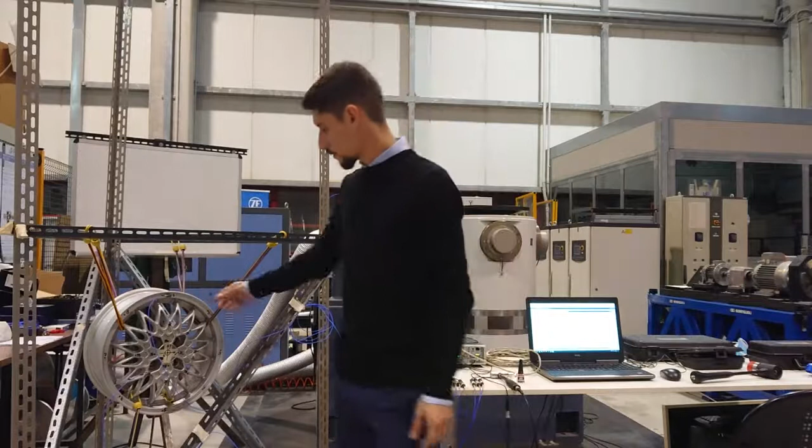So here we've got our rim that is suspended with these elastic bands in order to recreate the free boundary condition. I have already discretized our rim in 36 points. There are some points along the circumferences of the rim, other points here in the width between the two flanges, and other points instead here on these faces between the spokes.

Moreover, I have put the origin of the absolute reference frame, so our global coordinate system, here in the center of the rim, and I have already attached these triaxial accelerometers in these 2 points. In this case, for this analysis, these 2 accelerometers will be fixed in this position for all the time of the analysis, because we will use the hammer to impact all the other points, and therefore we're gonna perform the so-called roving hammer analysis.

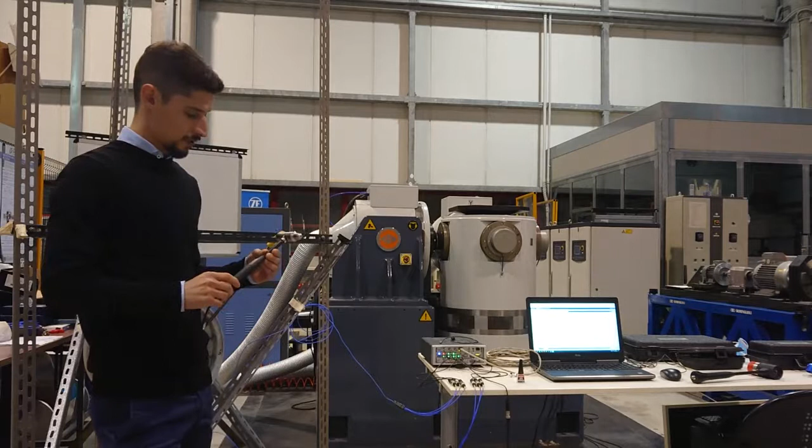This is the hammer that we're gonna use for the impact testing, and this is a special hammer, of course, because inside there is a transducer that can measure the force, and we can also remove the tip here of the hammer. This is a steel tip, but we've got also other types of tips. For instance, in plastic material with different hardness, and you can choose it depending on the material the test structure is made of.

I want to show you also other types of hammer with different dimensions. This is a very small hammer that can be useful for micro vibration analysis, or we have also the biggest one. You can use this hammer for large or heavy structures, and of course the bigger the hammer, the smaller the frequency band that you can cover.

Then of course the accelerometers and the hammer must be connected with the SCADAS. This is the data acquisition hardware, the SCADAS Mobile with just 8 input channels, but they are enough for us because in our case we have just 2 triaxial accelerometers, so 6 channels in total, plus of course the channel for the hammer, and then the SCADAS is connected via Ethernet cable with the computer. And that's all. As I said at the beginning, the setup is very simple. So I go to the computer and we're gonna perform the analysis together.

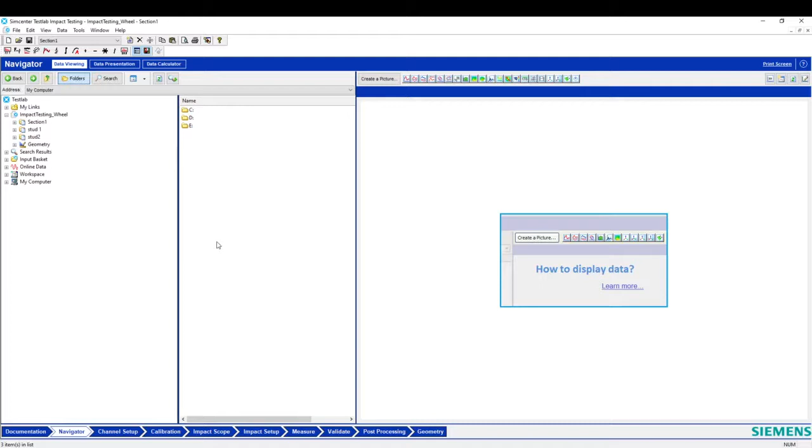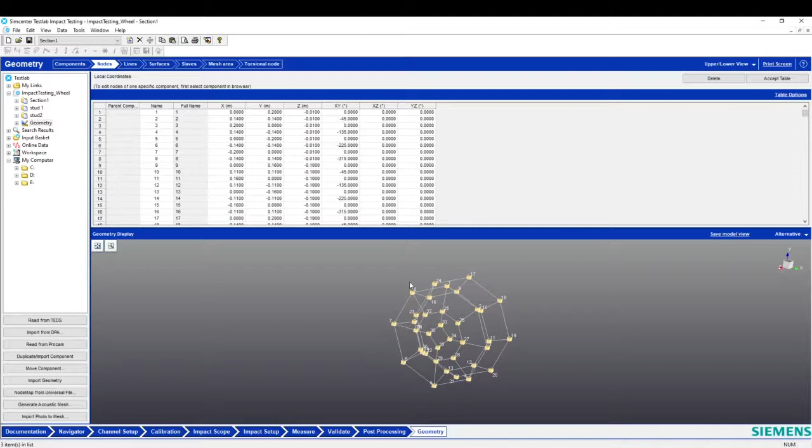The first step is to create the geometry file, or maybe import the geometry file. So we go here in the geometry section. This is our component that I already imported for you. As you can see, if we go on nodes, we have all our points that go from 1 to 36. We have some points along the circumference of the first flange, other points along the other flange, and other points here in the middle between the two flanges, and others in this face between the spokes.

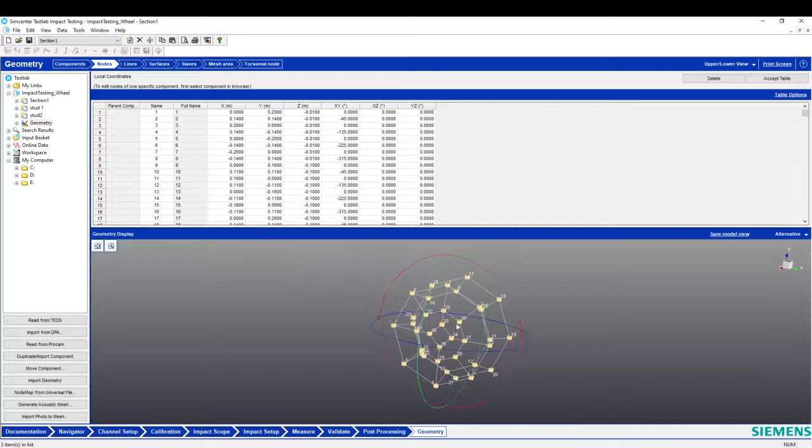Okay. Of course, in order to create your geometry, you should insert the coordinates. That means to insert the coordinates of each single point with respect to the origin of our global coordinate system. If you remember, during the introduction I said that I put the origin of our absolute reference frame here in the middle of this face of the rim. So you should go on your structure and measure the distance of each point with respect to the origin, and of course insert here the correct value in x, y, and z, of course in meters.

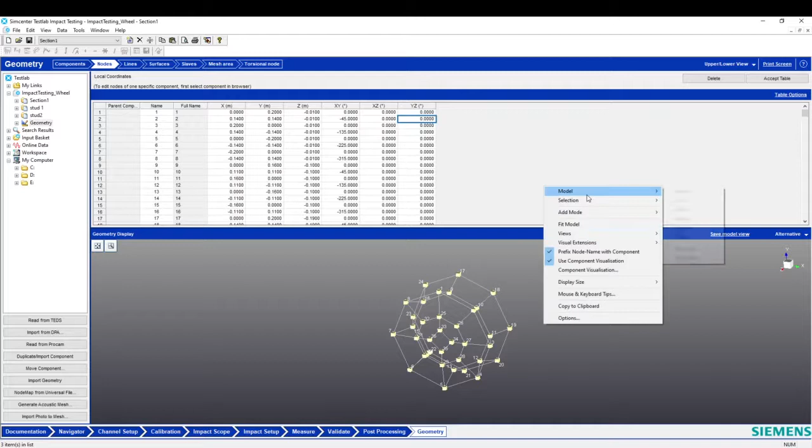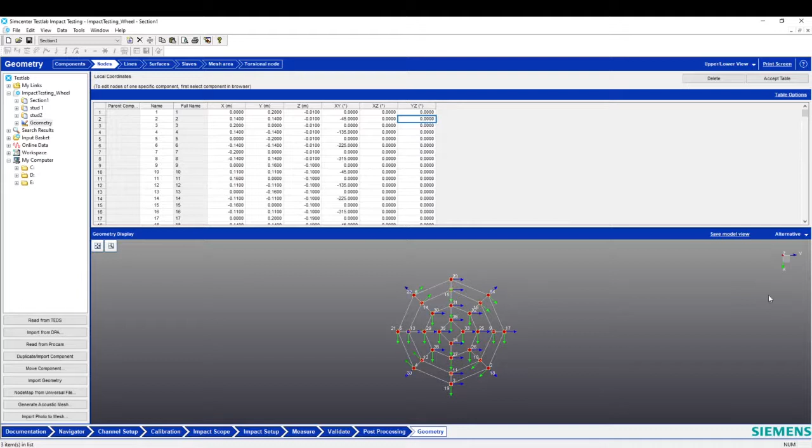And then if some points require the Euler angles, you have to insert also the Euler angles. So if I go on model nodes Euler angles, probably it's better to view XY. Okay, there are some points in the geometry, especially the points along the circumference of the rim, that need the Euler angle definition, especially the points that are along the bisectors of our reference frame. So you have to go on the structure with a goniometer, for instance, measure the angle mismatch between the local coordinate system, so the system of each point of measurement, with respect to the global coordinate system, so our absolute reference frame, and of course insert the correct value here. Okay.

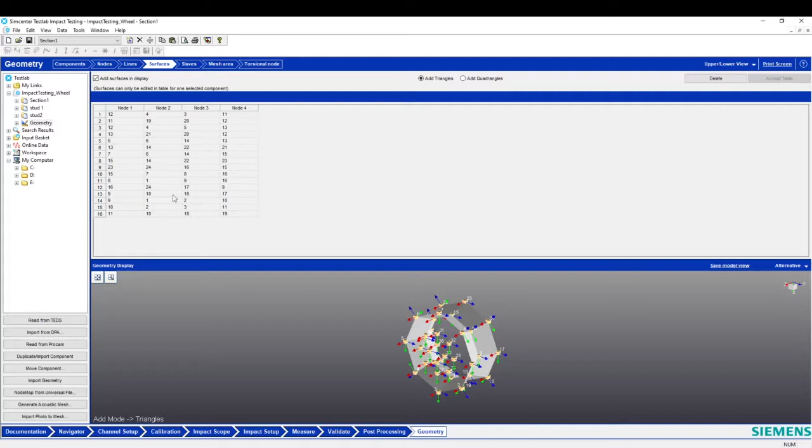Moreover, if I go on components, you can see that I have also added some surfaces. So if you go on the surfaces subsection, you can see all the surfaces that I have added, just to make our geometry clear.

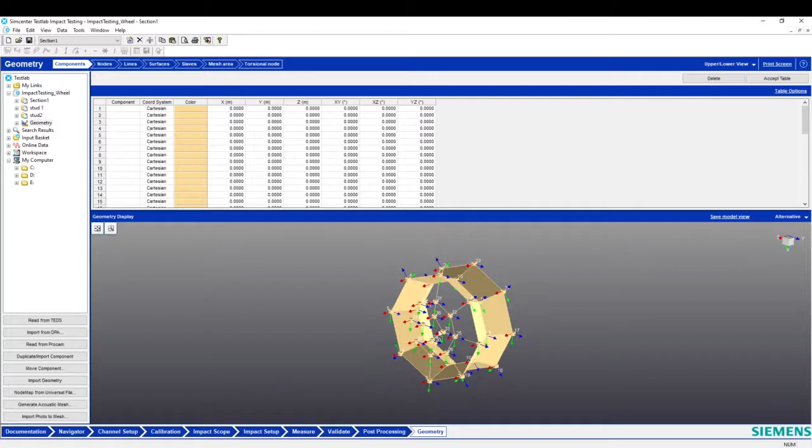Of course, if you want to import your geometry file, you have to search for it in the menu here on the left, then click on import, and you can import your geometry file. Now that we have done our geometry, we can skip to the channel setup section. Here we have to define the channel setup parameters.

Here on the left, you can see all the inputs of our SCADAS, which are 8, but we will use just these 3 inputs for the first accelerometer, another 3 inputs for the second accelerometer, and the last one is for the hammer. So if I click on show on, I just show you the enabled inputs.

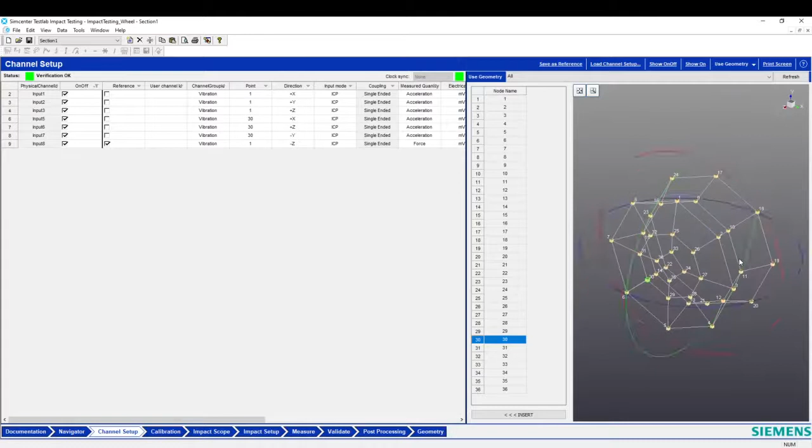So we have to write here the point names. If I skip to use geometry, you can see we have the first accelerometer here in point 1, and the second instead is in point 30. So we put 1, 1, 1, the 3 directions of our triaxial accelerometer, and 30, 30, 30.

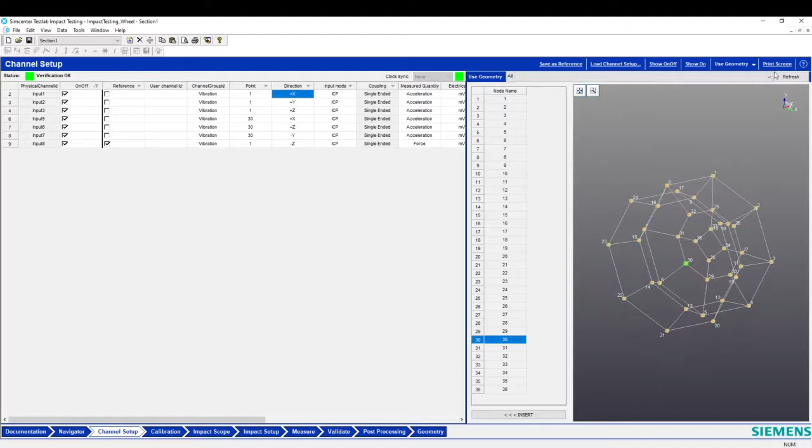Okay, about the direction, you know everything, so we have to select the measurement direction of your accelerometer, depending, of course, on the way that you have attached the accelerometer with respect to the global coordinate system. Input mode: all our sensors are ICP. Measured quantity is, of course, acceleration for our accelerometers, and force for our hammer.

Okay, for the actual sensitivity, you have to look at the calibration data cards that you find in the sensor box, and you have to write here the right value. It is millivolt per g for the acceleration quantity, and millivolt per Newton for the force. Okay.

Just the last thing: for our hammer, we have to switch on the reference button here, because our hammer is the reference point for the analysis. And about the point and the direction of our hammer, here you can put whatever you want, because, as explained in the following, we will use the hammer-based run name, a procedure that automatically changes the point names and the direction of our hammer during the analysis.

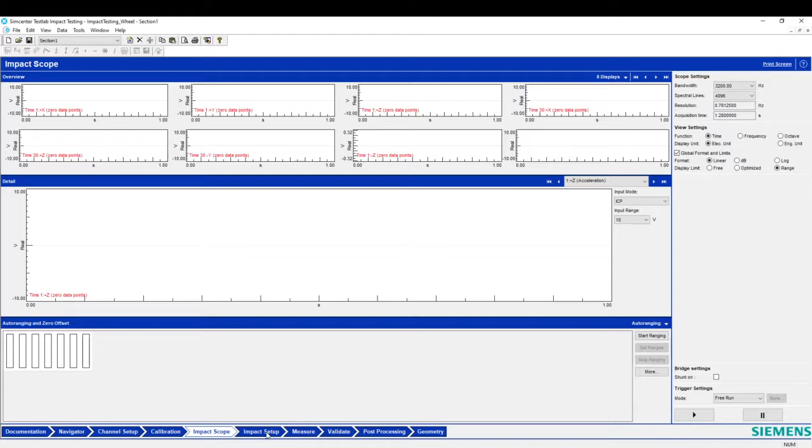3200 for the bandwidth for our frequency range is okay. Also the spectral lines, so we have a delta f of 0.78 Hz with an acquisition time of 1.28 seconds. Okay, so let's move on to impact setup. And here we are. As you can see here on the top, we have other subsections: the trigger one, the bandwidth, and the windowing.

Let's start with the trigger subsection, in which we have to define the trigger and the pre-trigger. So the first step is to click here on Start Scope, and then I move to the structure and hit our structure several times. As you can see, those are our impulses. Okay, now I come back and click on Stop Scope, and then Apply Suggested. With the Apply Suggested button, the software gives you the suggested value for the trigger. That is that one, in volts.

That is this threshold. If I zoom here, you can see this is our impulse, and this is the trigger level. And the pre-trigger in seconds. So if I zoom, and maybe single cursor X, 0. This is the pre-trigger time, okay? Now that we have set the trigger and the pre-trigger, we can skip to the second subsection, the bandwidth.

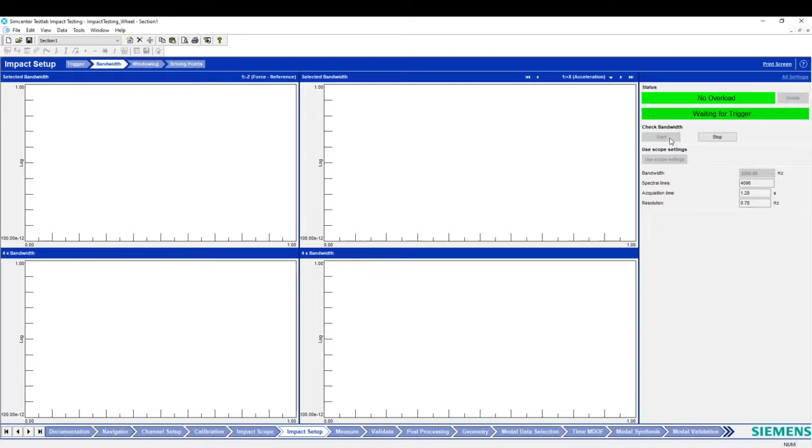Here we can check the frequency range covered by our impulses. So if I go here and click on Start, and then with the hammer hit our structure a single time, and click on Stop. Okay. You can see here the PSD of the input, the force, in Newton, and here instead the PSD of our accelerometer.

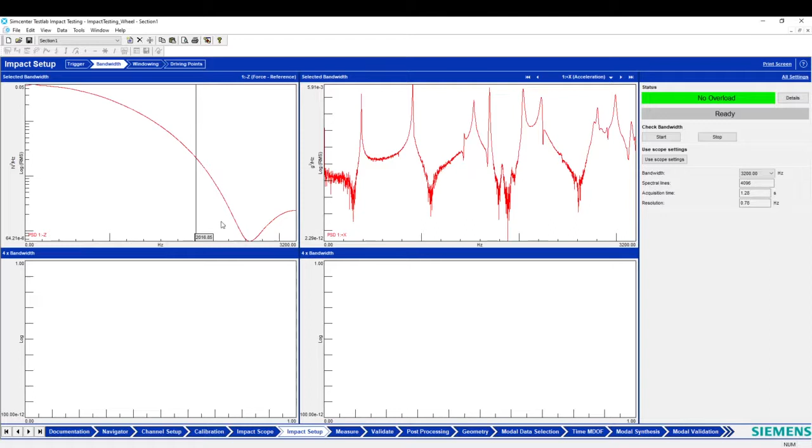Well, this display tells you that the energy level of your impulse is okay more or less up to 2 kilohertz, and then the PSD decays to 0, there is this ripple here, and so probably above 2 kilohertz you cannot correctly excite your structure. Okay, then we can move on to windowing.

In this subsection we define the window of the input, so our force, and the window of our responses. For the input, we can choose between uniform force and force exponential. The force exponential is the best choice for us. Instead, for the responses, we have uniform, which stands for no window, and exponential.

So if I click on apply suggested, here we have the suggested values for the two windows. As you can see here, these two displays are for the unwindowed input. I can zoom here. And this is for the unwindowed responses, so you can skip through all our acceleration measurements.

These other displays are instead for the window input, this one and this one. This is in time and this is in frequency. So this is the PSD of our impulse. I can zoom here to show you how it is the window impulse. Instead, these other two displays are for the window response and the PSD of the window response.

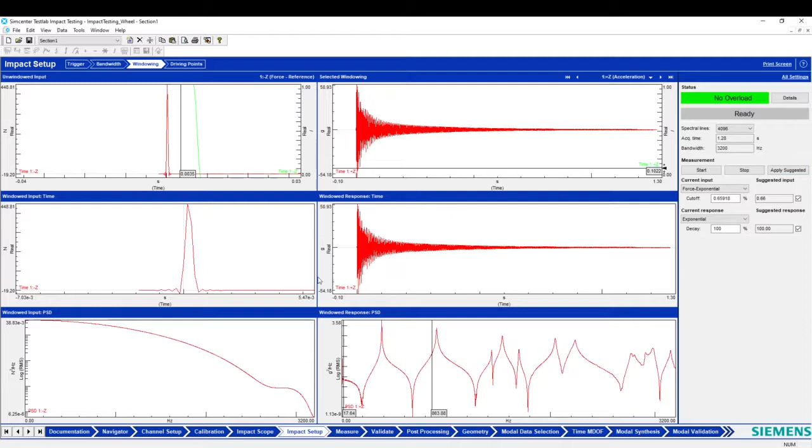With the impact setup section, we have done everything, so we can skip to the measure section. And here we are. This is the measure section. We can go directly to all settings just to have a look at all of them. We have here the acquisition settings that we imported in the impact scope and impact setup, the triggers, the windows, and we can choose other settings, for instance the FRF estimator. We can choose between H1, HV and H2. The H1 is okay.

We can put here our averages, maybe 3, just to show you how it is. The procedure is okay with implicit accept. The format and the scaling of the spectrum, RMS or peak, the cross power, PSD or power, and so on. But the most important thing here is this one, the run name option, the hammer based run name. And what does it mean?

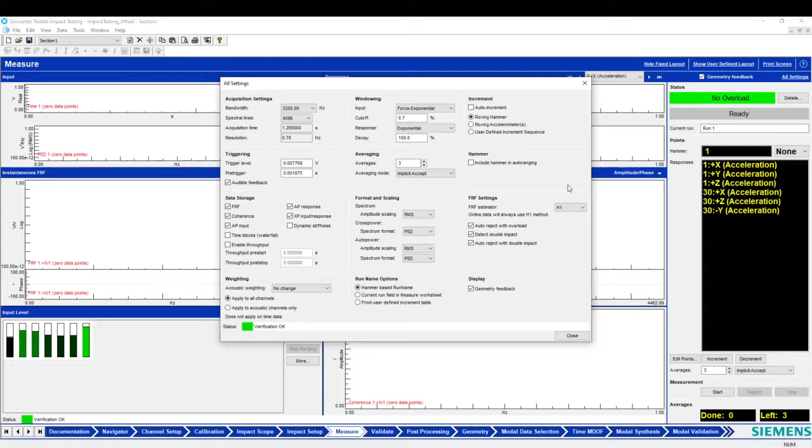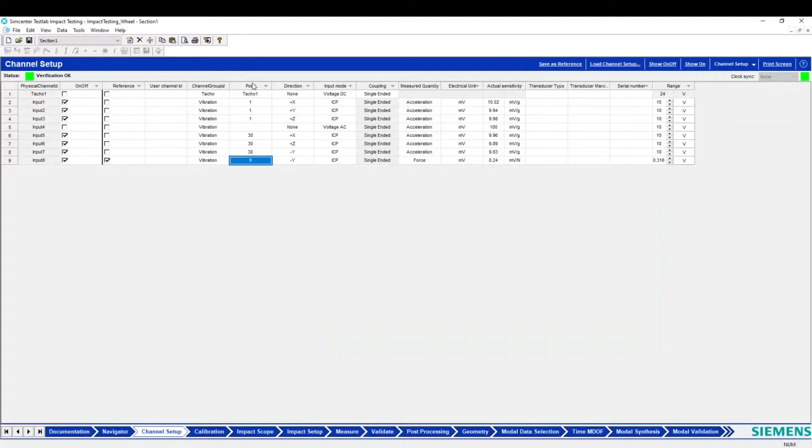Here on the right, in points hammer, I have to put the name of the point that I want to impact. So we start with point 9 and the direction. Our direction is minus y. It means that we start with this point in minus y direction, so the vertical direction, okay? And due to the hammer run name option, if I go to the channel setup here, in name and direction of our hammer, you can see that there are 9 and minus y.

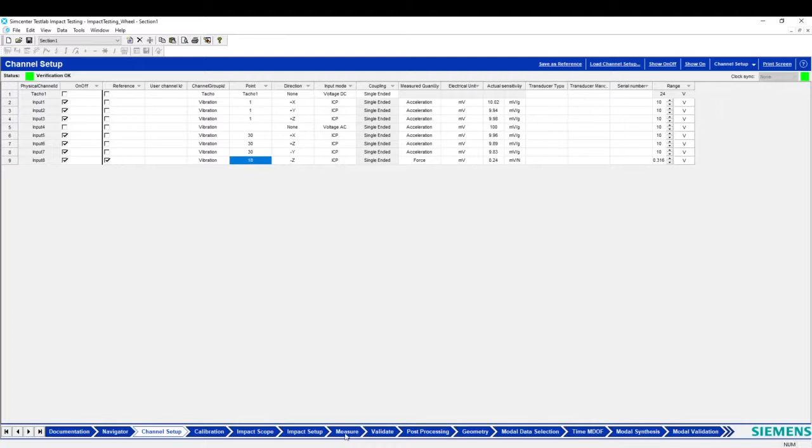If I change, for instance, and I put 18 in minus z, that is this point, and I go to the channel setup, the software automatically changes the point name of the hammer and the direction, okay? So we come back here to 9 minus y, and we start with the analysis. So I can click on start and impact our structure in point 9.

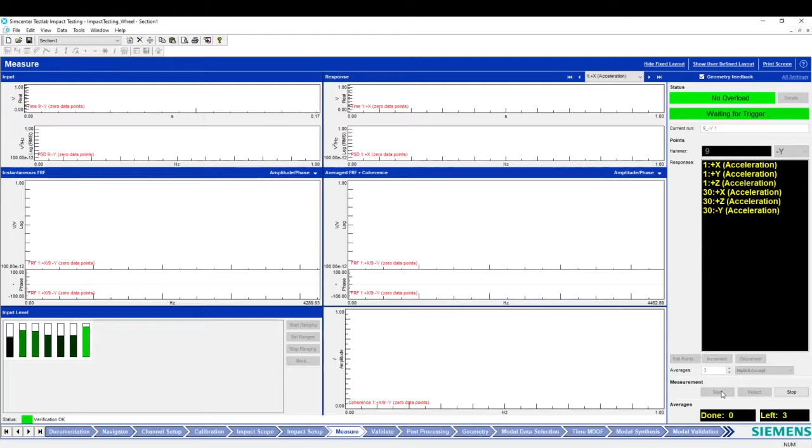Okay, just a second, I put 3 averages just to better show you the result. Okay, so now in these 2 plots, as you can see, we have the impulse, our input in time domain and in the frequency domain, so the PSD of the impulse. If I put a cursor, as you saw before, more or less 2K is the acceptable range for our impulses. On the right here we have our responses. You can skip between them. This is the time domain and this is the frequency domain.

Instead, here we have the instantaneous FRF, here the average one, and here the coherence. Of course, we have done just one impact, and therefore the instantaneous is the same as the average one. Here the coherence, that for the first impact you cannot visualize, and so I perform another impact. And now you can see that we have done 2 averages, one is left. Of course, something is different in the average FRF with respect to the instantaneous one. And now we have also the coherence value.

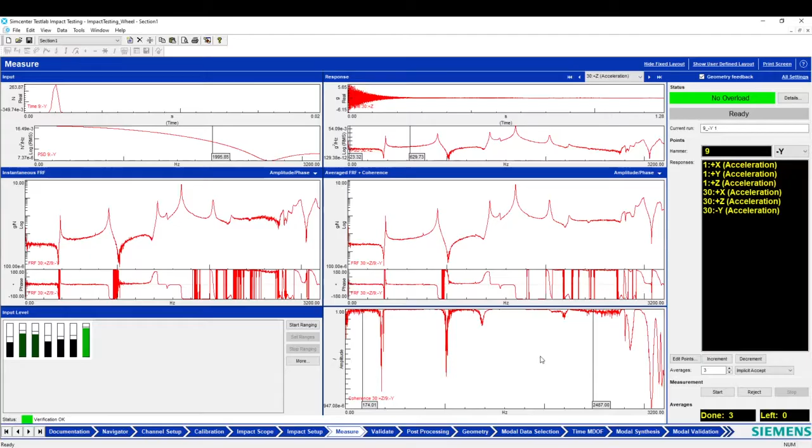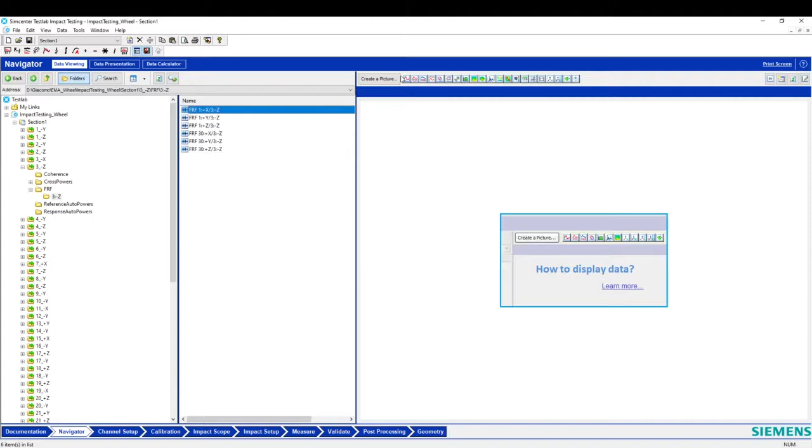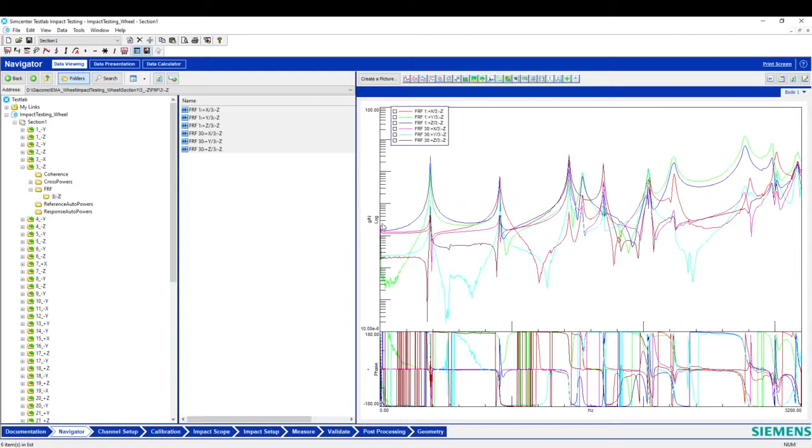Now that I have hammered all the possible points, we can see here all the measurements. So if, for instance, I open point 3 and I go to the FRF folder, you can see here we have the FRF of accelerometer 1 with respect to point 3, so when I am hammering point 3, and accelerometer 30 with respect to hammering 3. I can of course plot them in a Bode diagram. This is the format in log scale. But if you want, you can switch to real and imaginary, or you can display your FRF with a Nyquist plot.

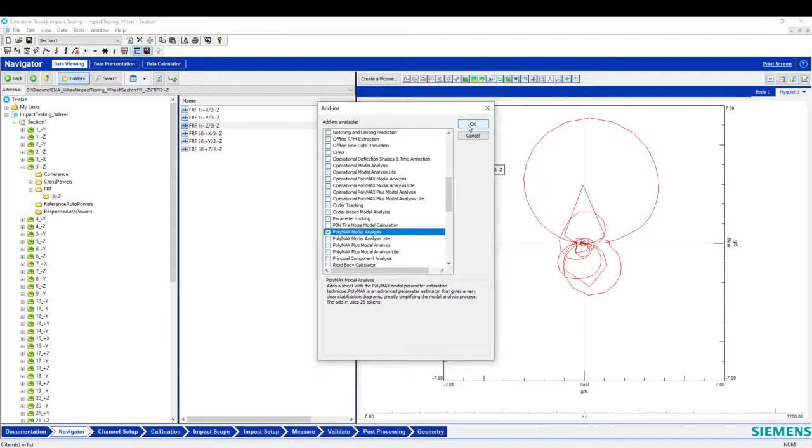Okay, so now we are ready for post-processing our data and to perform the modal analysis. So we have to add in our tools. We go to modal analysis for the LSCE estimation method, and PolyMAX modal analysis for PolyMAX, we click on OK, and then just a second.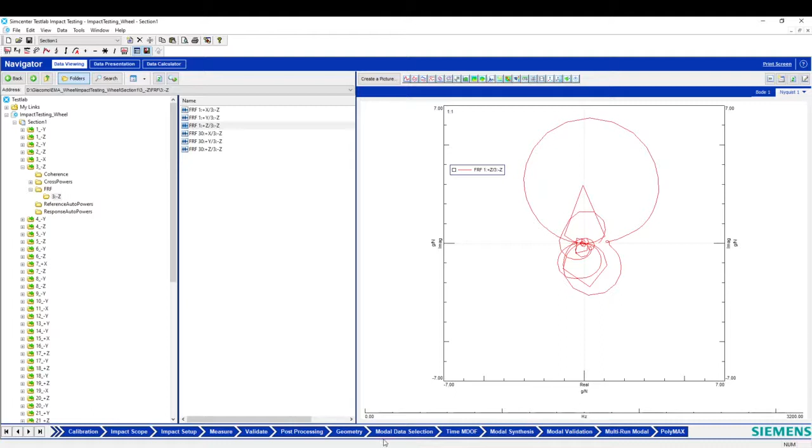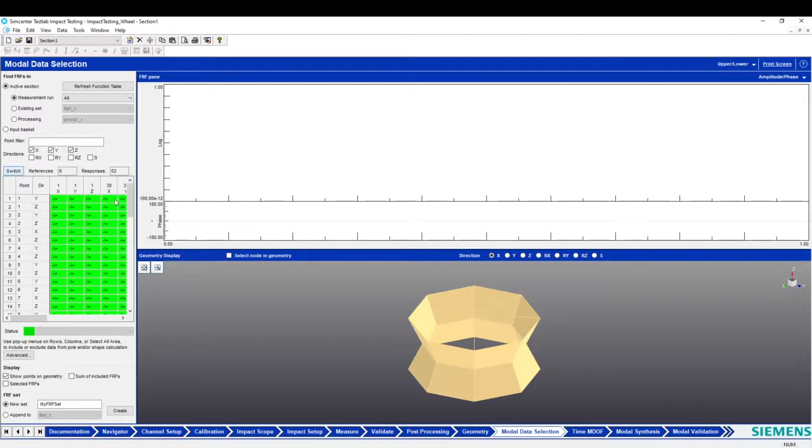So we go on modal data selection, and we got a warning message here that says there are many more inputs than outputs. You might want to switch the FRF table. I click on OK. This message is because we have 52 references here that are our hammered points, and just 6 responses here, our 2 tri-axial accelerometers. So if I click on switch, now we have obtained 6 columns of the FRF table, that is a valid data set for Test.Lab.

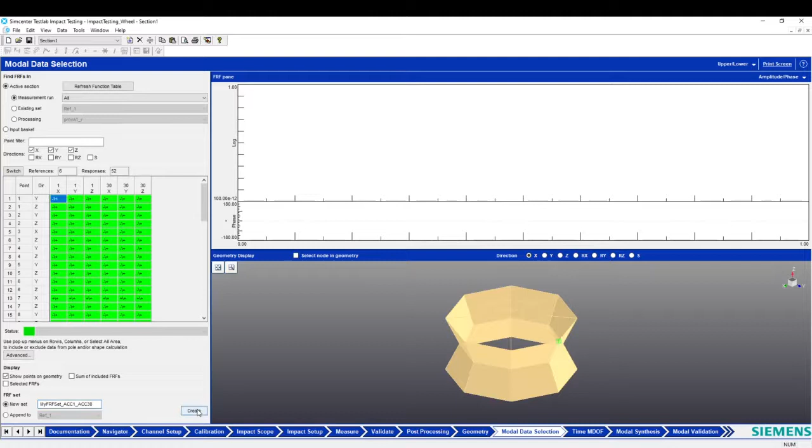Now I can create my FRF set. In this case, I take all the measurements, so ACC1 and ACC30. I click on create, and I have created my FRF set. I can of course click on selected FRF and click on sum just to display my data here. But I can also, for instance, click on exclude. In this case, as you can see, the measurement of accelerometer 1 became red.

It means that if I go here, my FRF set, I can create a data set with just the measurements of accelerometer 30. I can do the same with, sorry, exclude. Okay, I can do the same with accelerometer 1, create. Just because maybe we want to perform the analysis taking into account just one single tri-axial accelerometer at a time.

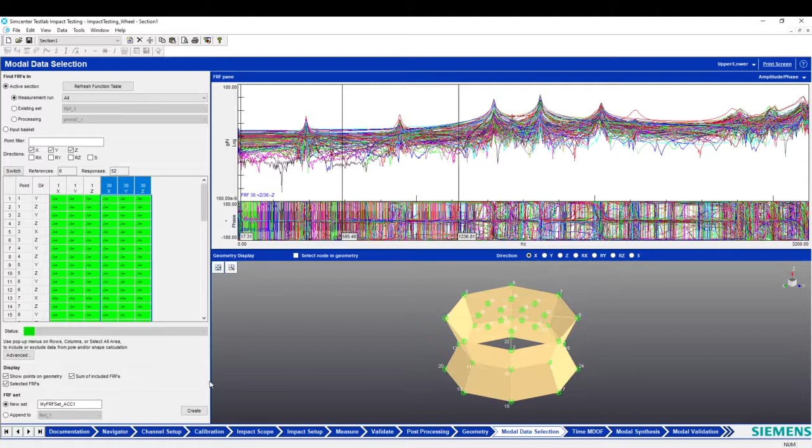Okay, now we have already created our FRF set, so we are ready for performing the modal analysis. Let's start with PolyMAX, and here we are in the band subsection. As you know, there are two other subsections to do, the stabilization and the shapes. If you go on change modal data selection in existing set, here you can see all the FRF sets that we have done. So the one with just the measurement of accelerometer 30, or the one with just the measurement of accelerometer 1, or both.

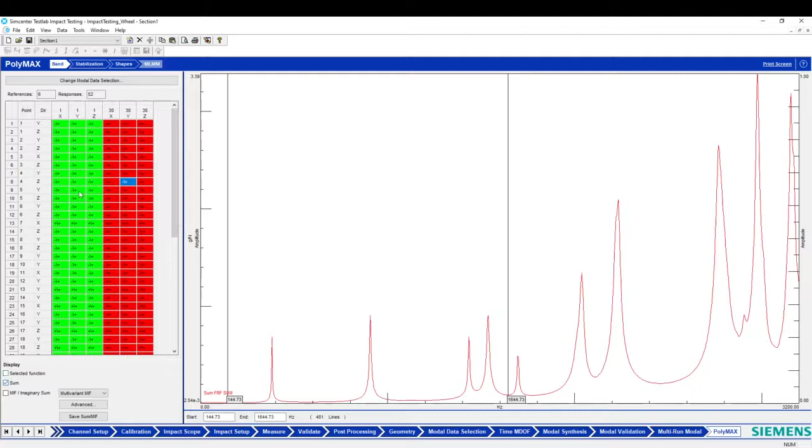Okay, so we can take this one. I click close, so we perform the analysis with just the measurement of accelerometer 1, so in point 1. As you can see, the measurements of point 30 are red. Here, if I click on selected function, I got all my FRFs. This is just the FRF sum, and in this subsection I just have to define my frequency band, so we can perform the analysis from 300 to maybe 1800. Sorry, I put 10. Okay, just to analyze these peaks, so 5 peaks, and then we can skip on stabilization.

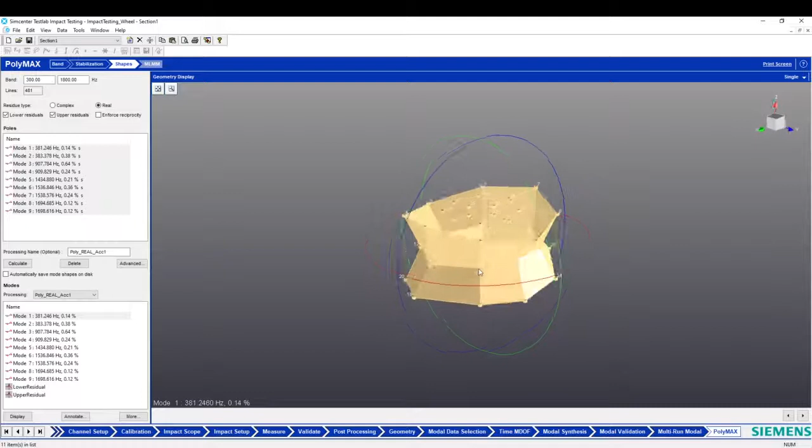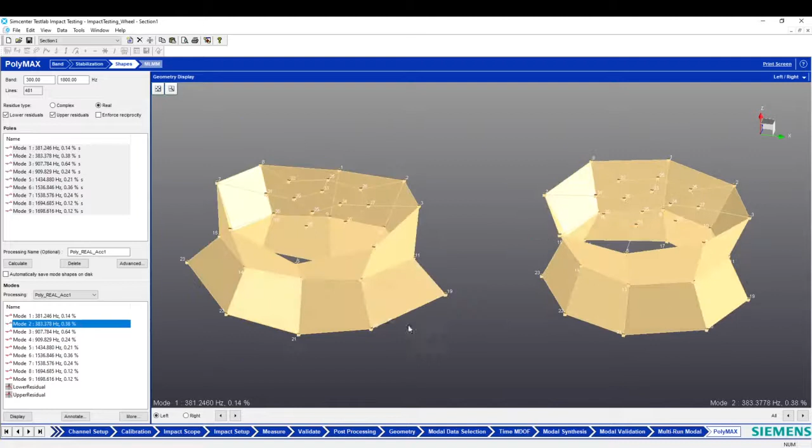So this is our first mode. I click on animate. As you can see, it is a bending mode of our rim, the backside. But I want to show you also the second mode. Maybe it's better to put here and here. Click on animate. So now if I go on views, here on the left we have the first mode, on the right the second mode, and as you can see, these two modes are two normal modes, two orthogonal modes, so two different mode shapes, and this is due to the axisymmetric structure that we have.

Our rim is an axisymmetric structure, and with this sort of symmetrical geometry, you always have two different normal modes at more or less the same frequency. This is because in the stabilization diagram we have two different lines of stable poles in the same peak. I take both of them because they are two different normal modes. Ideally they should have the same frequency, but probably due to manufacturing imperfections, they have just a few hertz of difference.

We can also display the third and fourth modes. As you can see, these are two normal modes with just 2 hertz of difference.

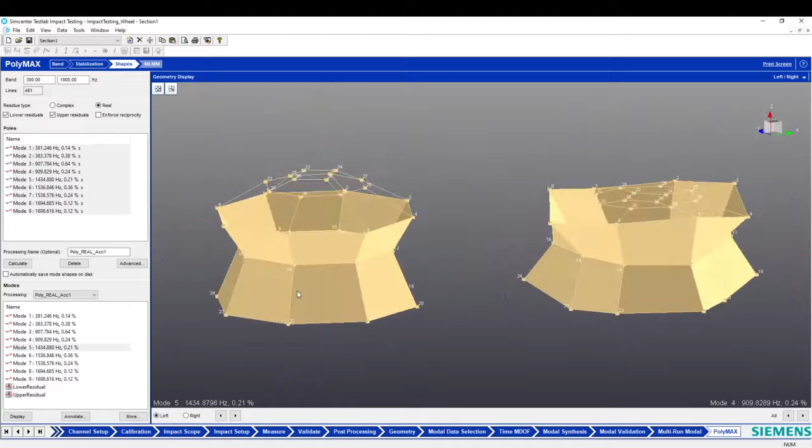We can skip to the fifth mode. This mode is a pumping mode of this face of the rim, as you can see.

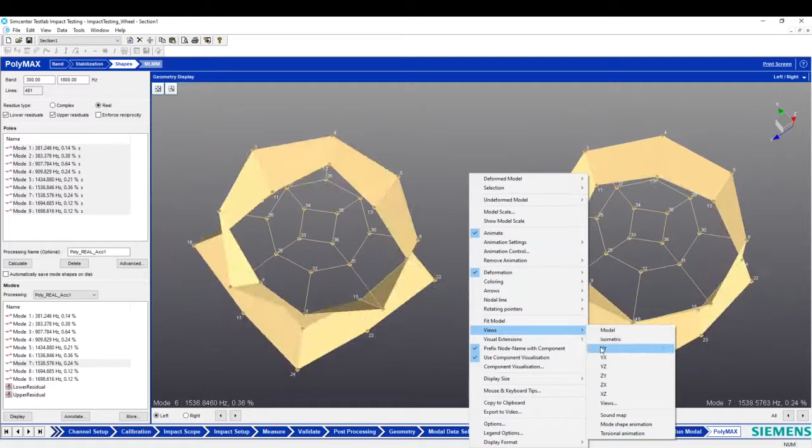Then we have mode 6 and mode 7, another two axial symmetric mode shapes. In this case, probably they are not two different mode shapes, because these are probably the same mode shape.

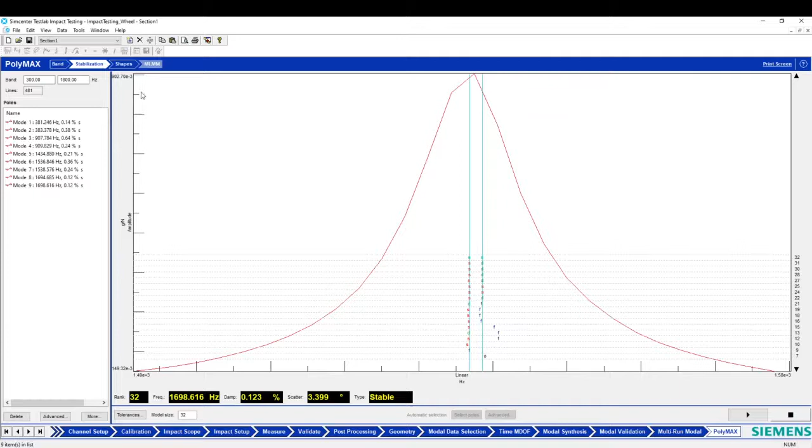If I go on the stabilization diagram, yeah, probably they are not different mode shapes. Anyway, we can check at the end during the modal validation analysis.

And then the last one - this mode shape is also axial symmetric.

Now we have done the modal analysis procedure using PolyMAX. We can do the same by using the time MDOF, the LSCE estimation method. Here we are in the band subsection, and we just have to select our bandwidth, which is the same as the one we used for PolyMAX.

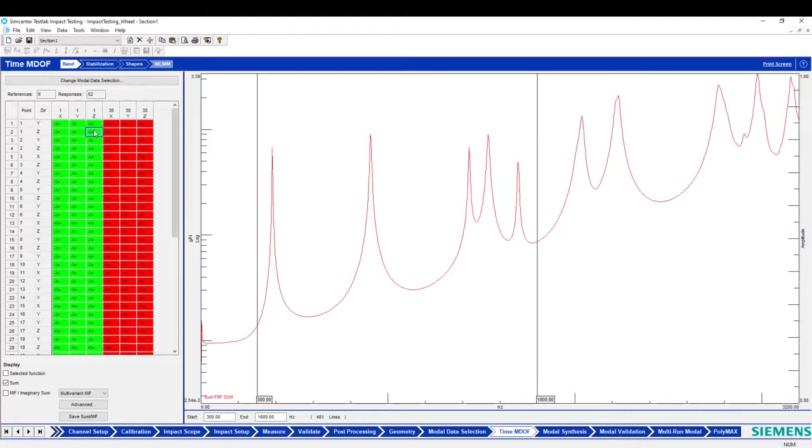Here we have our FRF set with just the measurement of the accelerometer at point one, and then we can skip to stabilization. Here we are in the stabilization diagram of the LSCE tools. As you can see, the diagram is more confused compared to the one from PolyMAX.

So we can select our stable poles. Once again, we have two different lines of stable poles for the same peak here. Then move on to the second one - we take this one and this one.

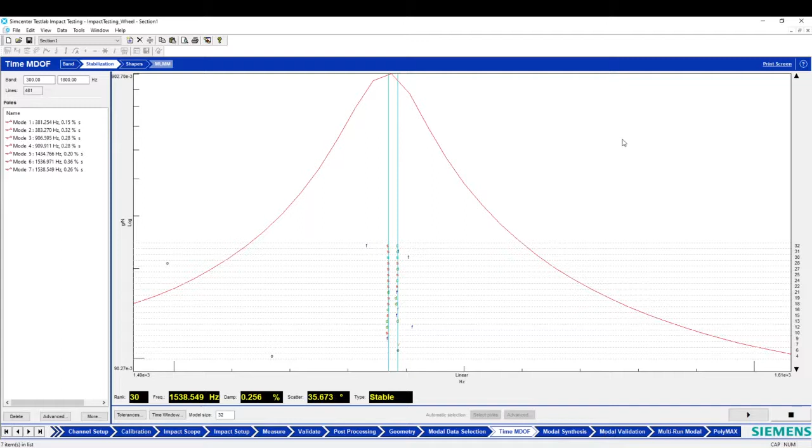This is the peak where probably we have some problem. Anyway, we can try to take both of them just to show you what happens during the validation of our modal result.

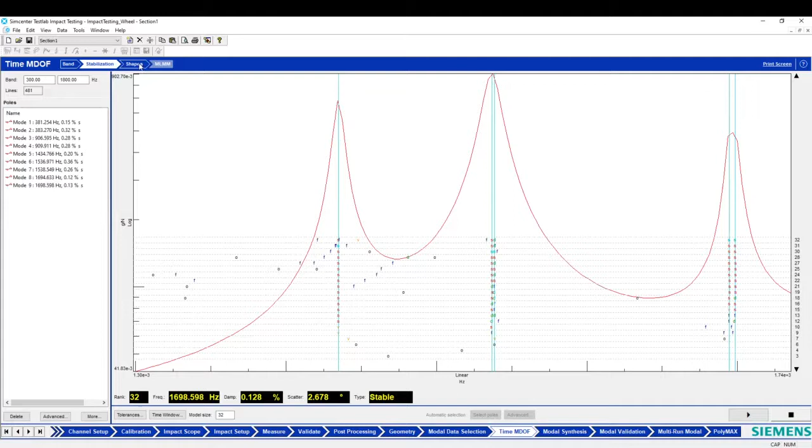So once again, 9 modes in total. We can skip to shapes, and we calculate with the real values.

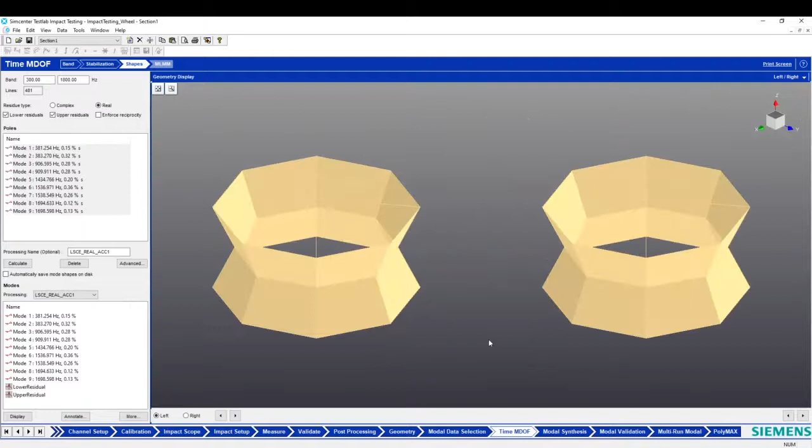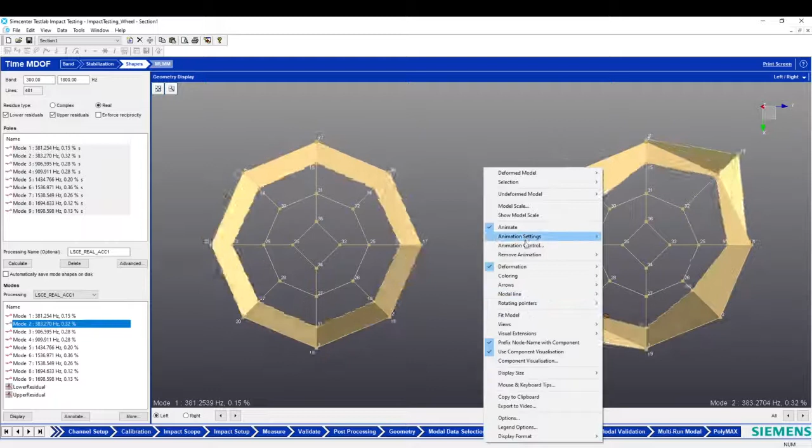We click on calculate, and just a second while it puts the markers here and the names. I don't know why it's changing the view. Probably it's better to increase the frame cycle.

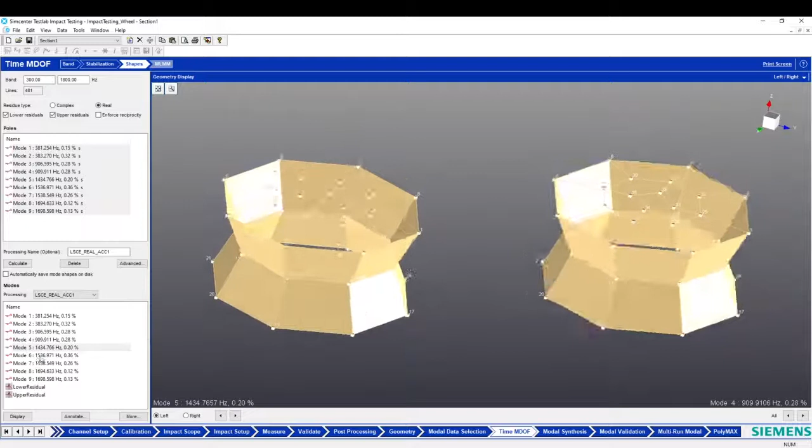So mode 1 and mode 2 as before, mode 3 and mode 4, the pumping mode of this phase, and then once again we can try to view if something is okay, and then the last two.

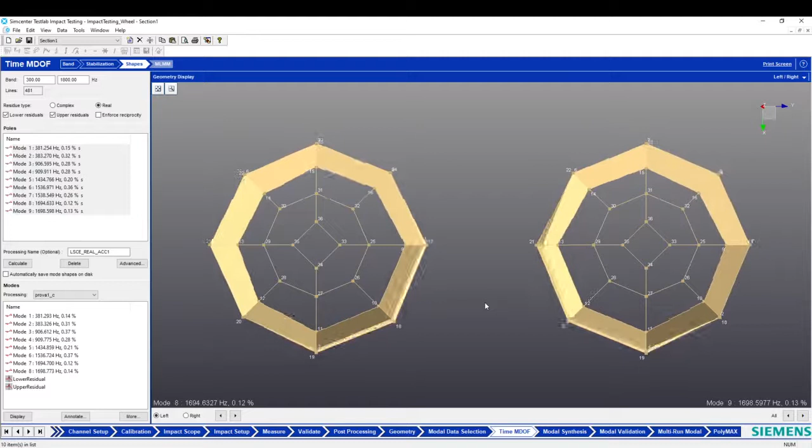Now we have done the analysis also with the estimation method LSCE, and therefore we can skip to modal validation in order to validate our modal result. And here we are.

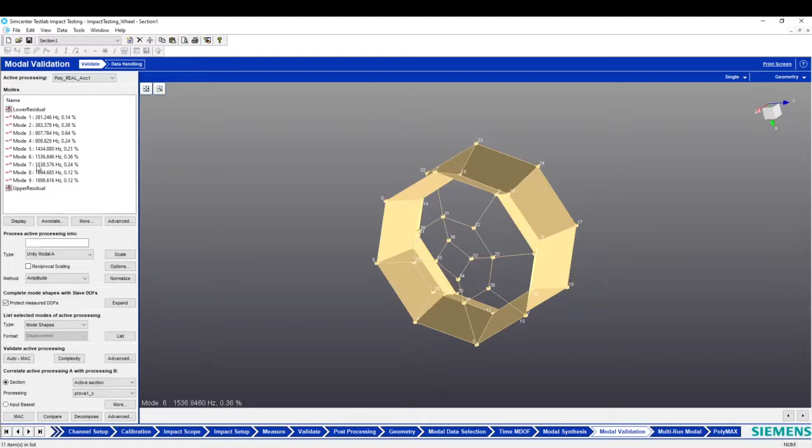Here we can activate our process, either the LSCE or the Polymax one. We start with Polymax. Here are the estimated modes. If I click on animate, this is the first mode, the second one, and so on.

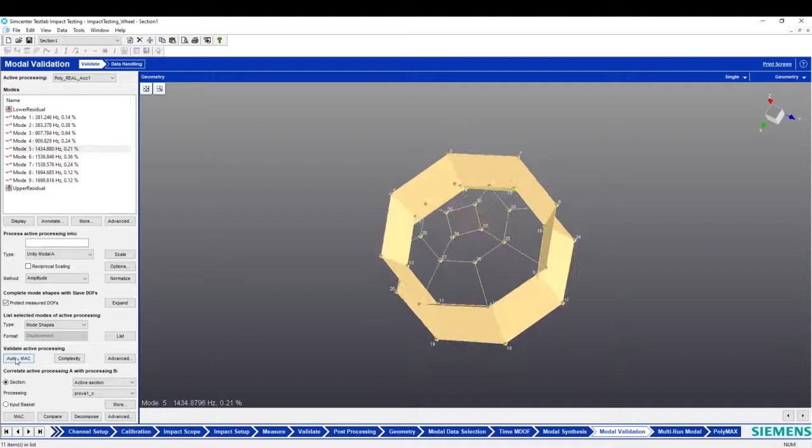But what we want to do is see the autoMAC and the complexity. So if I click on autoMAC and put matrix, this is the autoMAC matrix.

As you can see, we have 100% here along the diagonal and low level on the off-diagonal terms, but here we have some problems - of course, less than 30% of autoMAC is an acceptable result. But anyway, there is something between mode 6 and mode 7, so probably a more detailed investigation should be done here.

If I go to complexity and put the table, in this case we have a very good result because the MPC is very high here, and the MPD is 0 degrees with low scatter. So a very good result for Polymax.

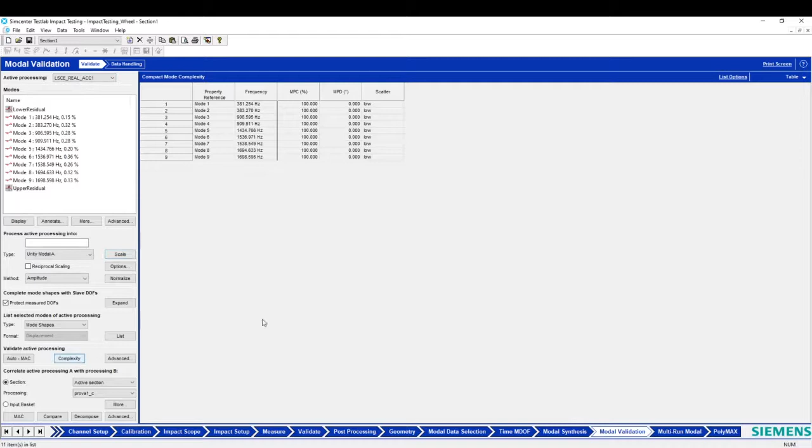If we consider the LSCE, the same result. Regarding the autoMAC, more or less the same result. In this case, the correlation between mode 6 and mode 7 decreased to 80%.

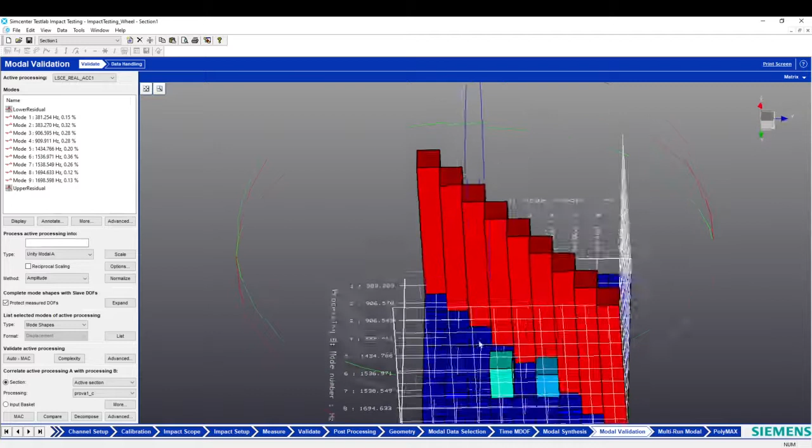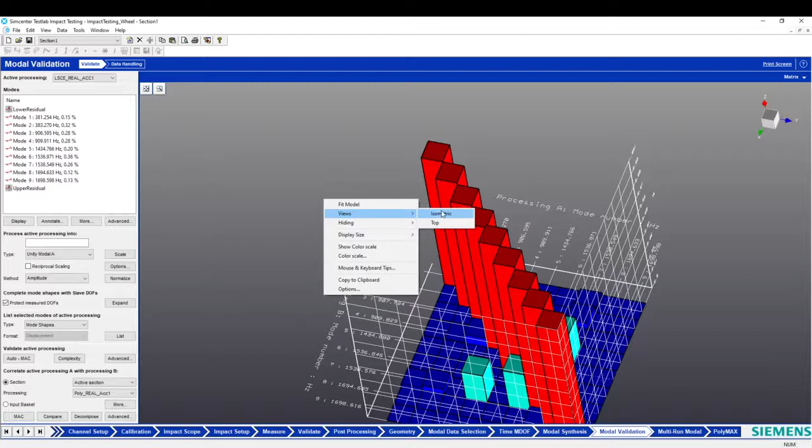And therefore, the last process we can do is compare the LSCE with the Polymax by using the MAC. So LSCE is here, and here we put Polymax. We click on MAC, then view, top, and we have our MAC matrix that compares the eigenvector estimated using the LSCE tools and the one estimated using Polymax. Globally, we have obtained very good results, as you can see.

More or less 100% along the diagonal. Of course, we have correlation between mode 6 and mode 7.

Anyway, we could repeat the analysis by selecting different stable poles and watching what happens during the post-processing. Anyway, for us, in our case, we can consider our analysis completed. Thank you for the attention.